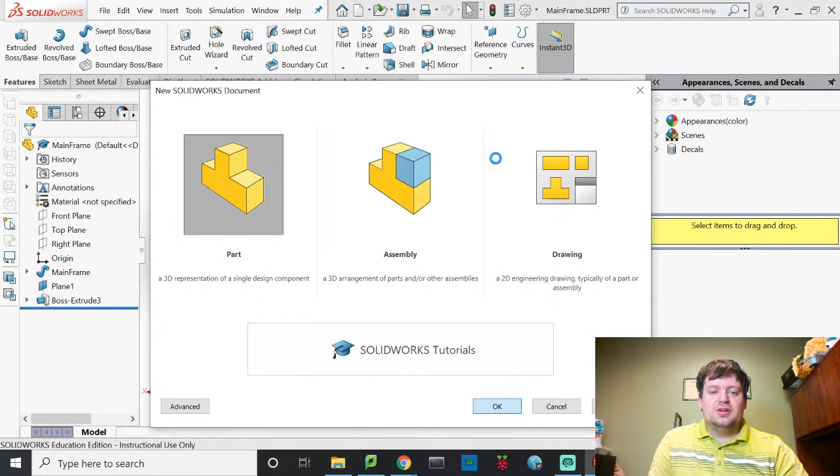What we're going to do now is go up and create a new file. Again, we're only really focusing on creating parts right now. You can create parts from an assembly drawing; in my opinion, it's bad practice, but you can. So I'm going to start with a sketch. For my sketch this time, I'm actually going to be drawing on the top plane. I want to extrude along the front plane, but I'm going to create something on the top plane. And I have my reasons for this.

So here I'm going to create a rectangular profile. Okay. Then I'm going to add a relation to make the center point of this line, which if you hover over it long enough, eventually you'll find it. And I'll add this one, and it will make them be horizontal. It doesn't really do much for determining position, but it does force that to be in line with the origin of this drawing. So I'm going to go ahead and hit OK.

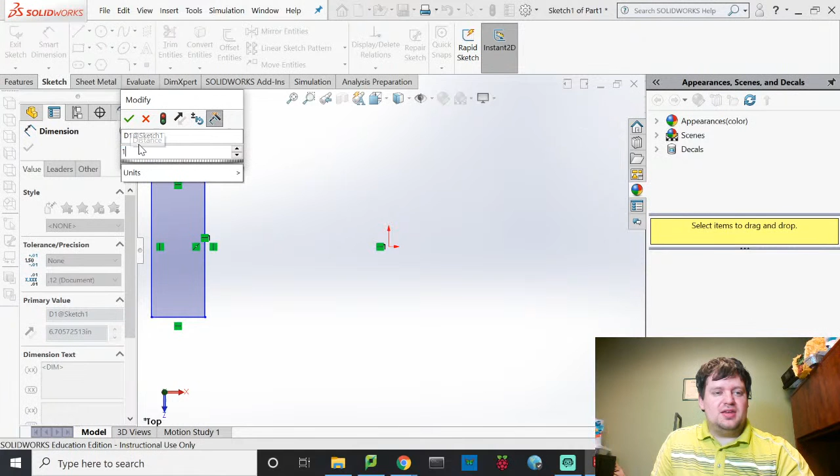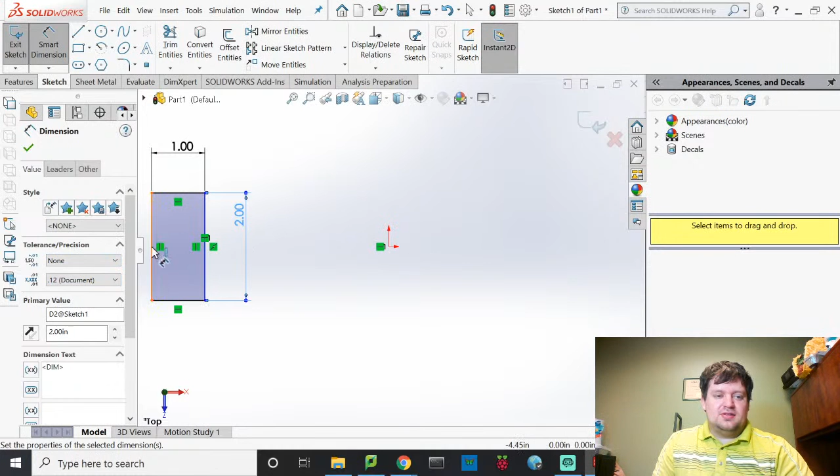I'll throw some dimensions on this. Here we'll make it maybe an inch thick, and then maybe 2 inches thick. And then since for this component I'm designing a wheel, I want my overall wheel diameter to be like 30 inches. So the distance between this outline line and this point right here is going to be 15 inches.

Okay. And now you'll notice, just zooming in by scrolling the mouse wheel and panning by holding control and holding the mouse wheel, I just have a rectangle, and that's it. So I'm going to exit the sketch and show you what this looks like. Exit the sketch, go into features. I'm going to do a revolved boss base. What a revolved boss base does is it allows you to rotate a profile, and here on my selected contours I'm going to pick this one, about an axis.

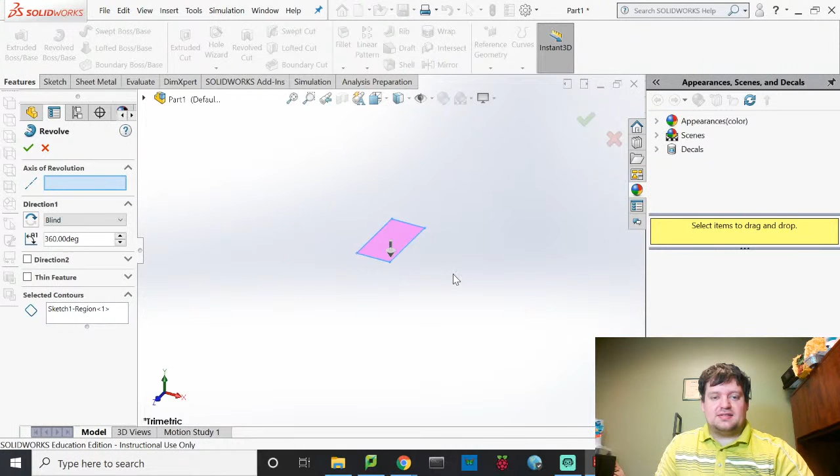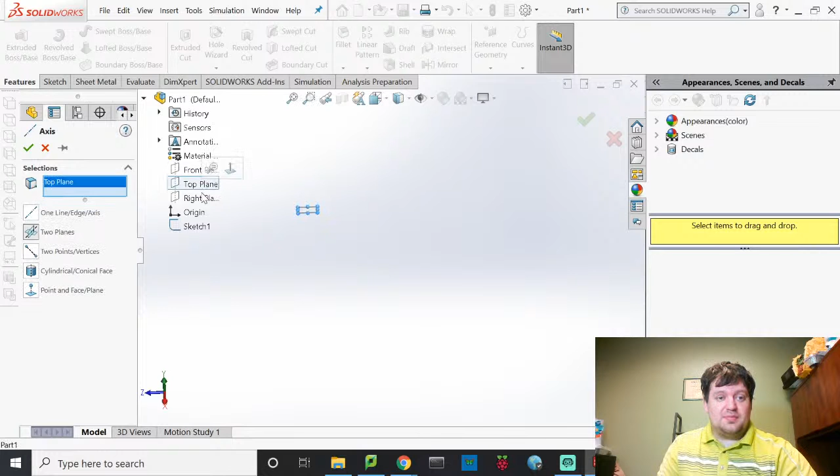Now here, I don't have an axis picked. I don't have an axis drawn that I can even really rotate about. So at this point in my drawing, I actually can't do the revolve yet. In order to do the revolve, I'm going to create some reference geometry. I'm going to create an axis, click two planes, and for my selection, I'm going to pick the connection between the top plane and the right plane.

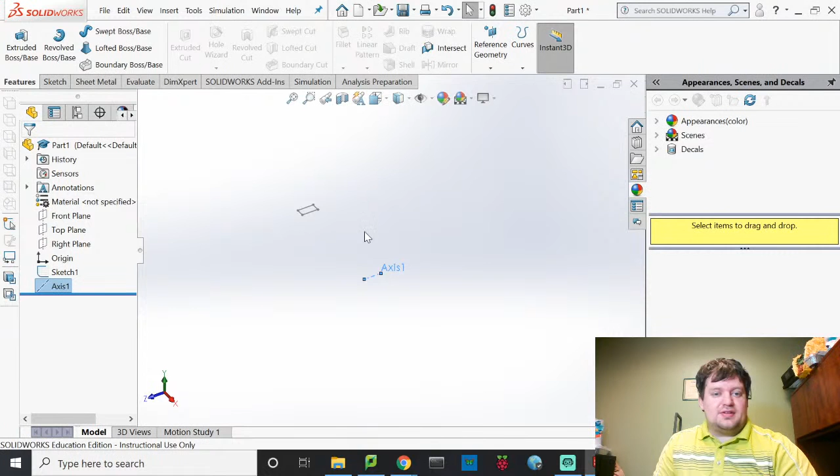Okay, so those two, and having the intersection of them, if I hit yes, it'll create an axis at the origin where the intersection between the top plane and the right plane is. That was the whole reason why in this sketch I made it so far away from the origin, because I was going to put an axis there. You could also draw a line in your drawing that defines your axis. That would have worked too. I actually like drawing axes just because I'm weird like that.

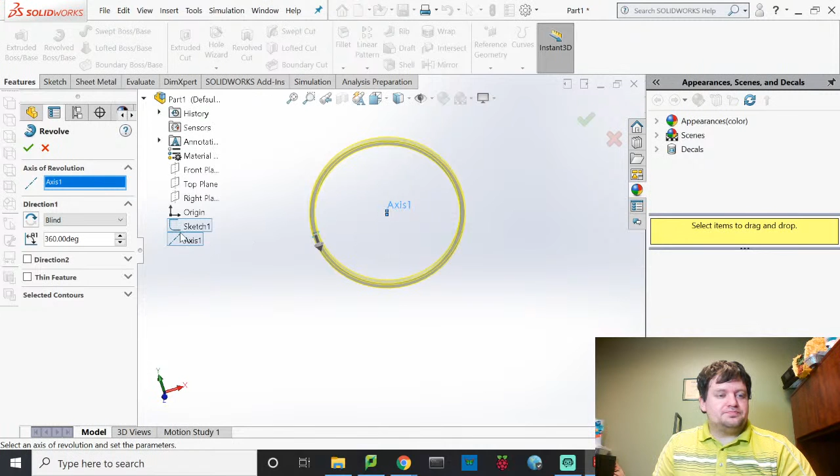I'll go ahead and pick my axis, and you'll notice right away it draws a loop. I have some features that I can change here, like I can only make it a half loop if I wanted. You could also say only rotate up until it intersects with the surface. You can make a thin feature, which will just make it a thin hollow tube, which would be a more accurate tire, but it is what it is. So I will not be doing that. I'll go ahead and hit OK.

And this is now my tire. Now my tire looks terrible. This is very old school. It's like one of those old wagon wheels, just throwing some spokes in here and we'll have a good old time. Yeehaw.

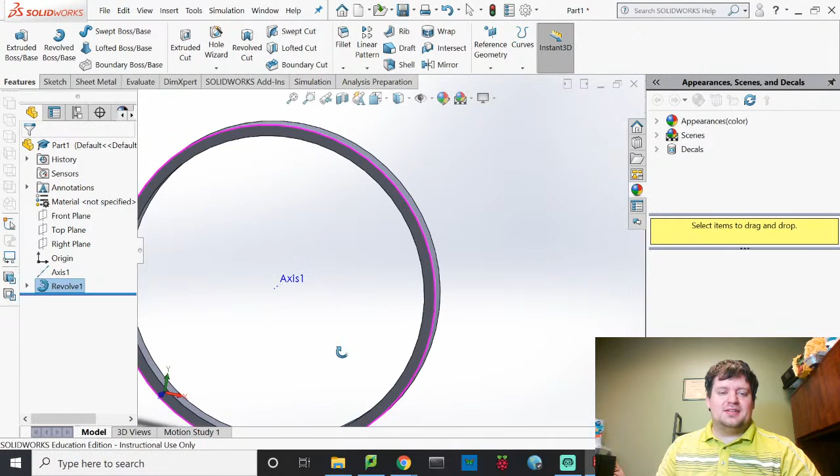Yeah, no, I am going to go back in and I'm going to edit this quickly just to give a little bit of a different shape. Now, if you would have done this right the first time, good on you. But I did not. So here I have this rectangular shape.

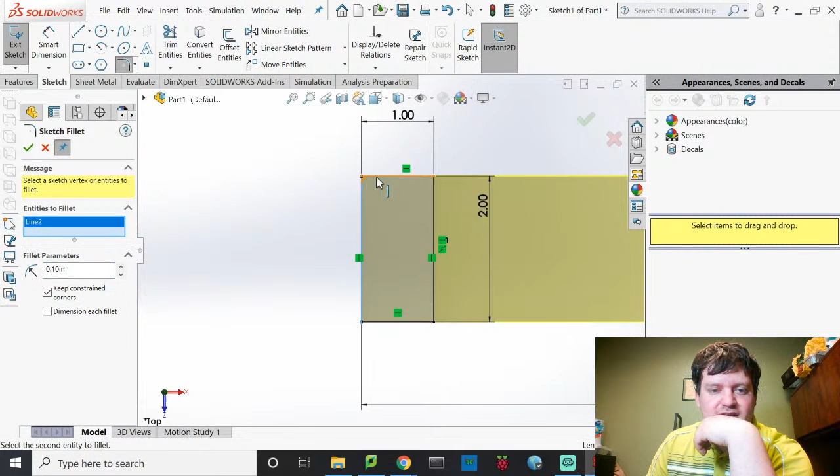What I'm going to do now is I'm going to go in and I'm going to fillet this edge here. I'm going to change this edge radius to about 0.5. Give it a big curve. And I'm going to do the same over here. Pick these two and hit OK and be done with it. And this is going to be my new bike profile.

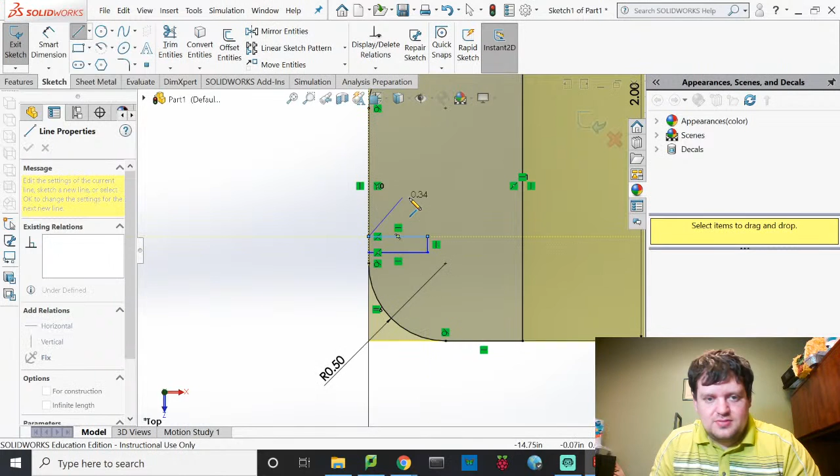Now I'm going to give a few little central creases in here. This will be like a road tire, something like that. So I will do that. So start on this line, go over here, go back, enter, enter, and then you know what

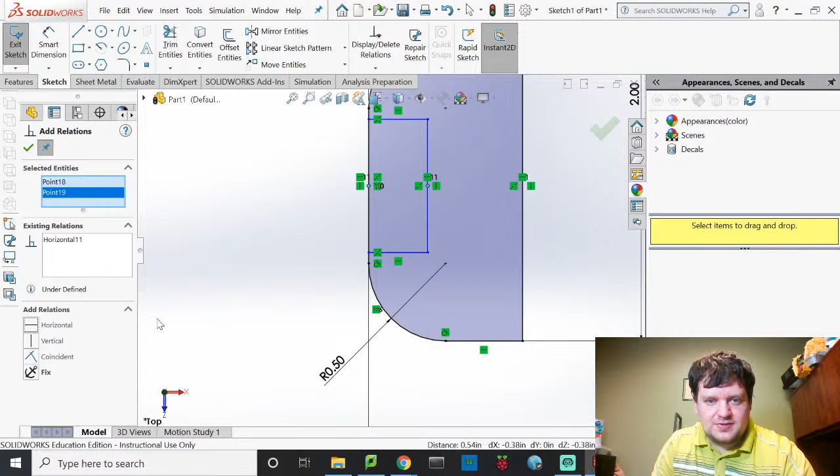I will do actually is I'm going to move this to the center, so I'll add a relation between this and the center line here, and I will make them horizontal. Okay, so now it spans the center here. I'll give some dimensions to this. This distance here, I want it to only be about the thickness of a penny, so about 0.05 inches. I'll make it real thin.

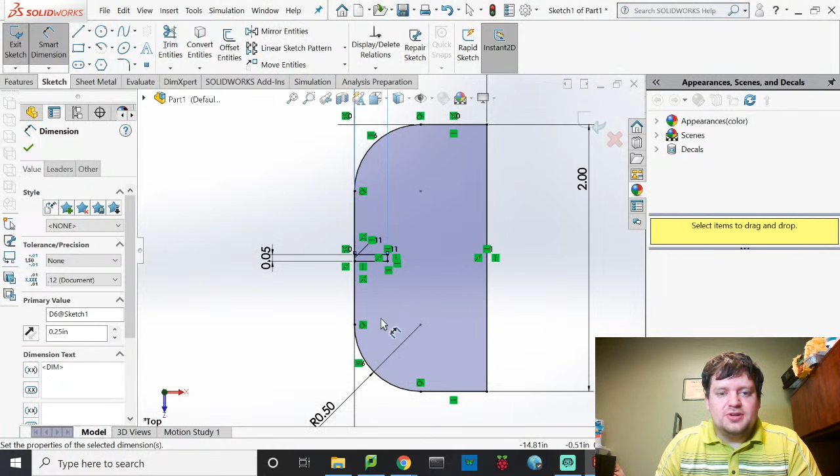And then for length, I want this to be, I don't know, maybe, they're usually pretty shallow. I'll make it about a quarter of an inch. Okay. So that's my new tread line. Now you'll notice this is fully defined. The only thing I'm missing is I need to trim that. So we'll go in, cut that line, and we're good.

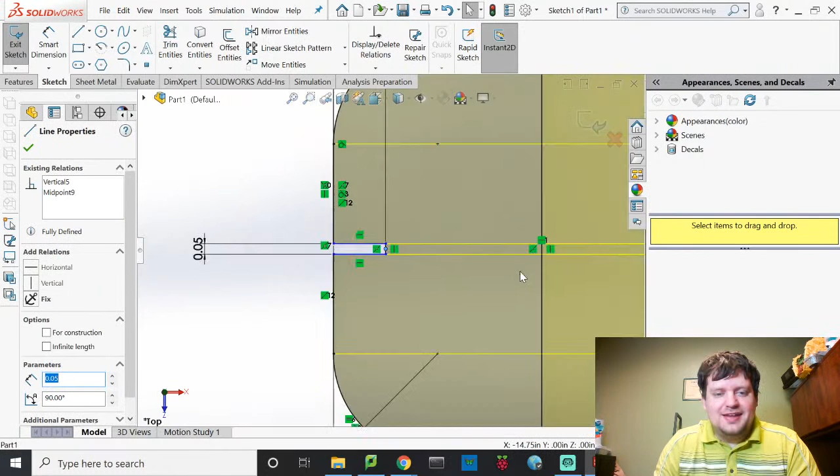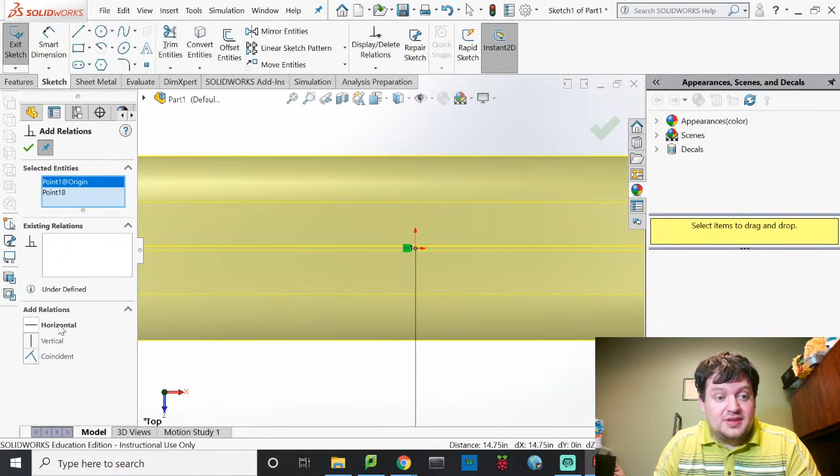Oh shoot, I just cut one of the relations. Yep, oops. I'm gonna have to fix that. I'm actually gonna add a relation between that and the center origin, because I know I'm not going to delete that. Okay, so now my drawing should be fully defined again. Huzzah!

Now I want to have two more of this, so I'm going to create a linear sketch pattern. I'm going to have it go down the x-axis. Whoa, nope, that's not how you do it. Yeah. I don't want it down the x-axis, I'm just going to go ahead and type in 1 here, which basically says don't do it in the x-axis.

Y-axis, I'm assuming that's up and down. We'll say I want 3. Yeah, then it does go up and down. Even though it's weird, it says y-axis, it just means up and down. Don't know why that is.

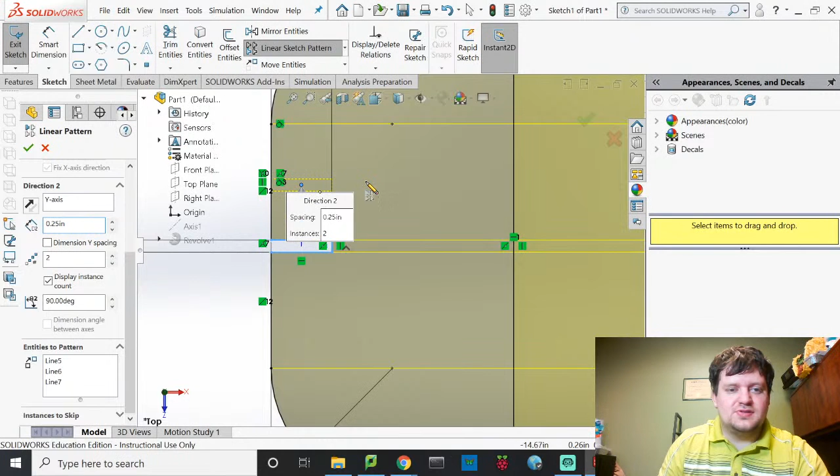And it's mirroring these lines, and right now I have a distance of 0.1. So, you know what, I'm just going to make this be 2, and I'll have it be 0.25 inches. Yeah, and that looks pretty good to me. So, yep, I'll go ahead and hit yes on that. I'm going to do that again on the other side.

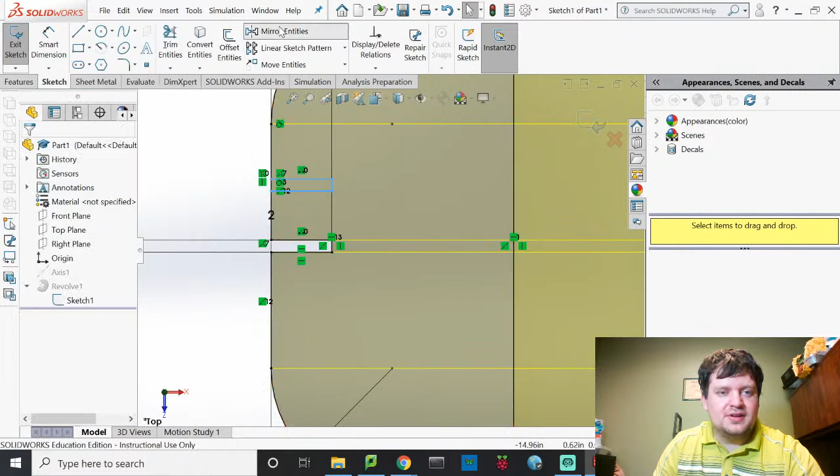Oh, you know what, actually, I'm just going to mirror this feature. So I linear arrayed it to create that one. It's all dependent on this feature. But now, I'm going to mirror about... Oh, I do not have a mirror line. Dang it, I don't have a... I guess I'll just... You can just copy these two.

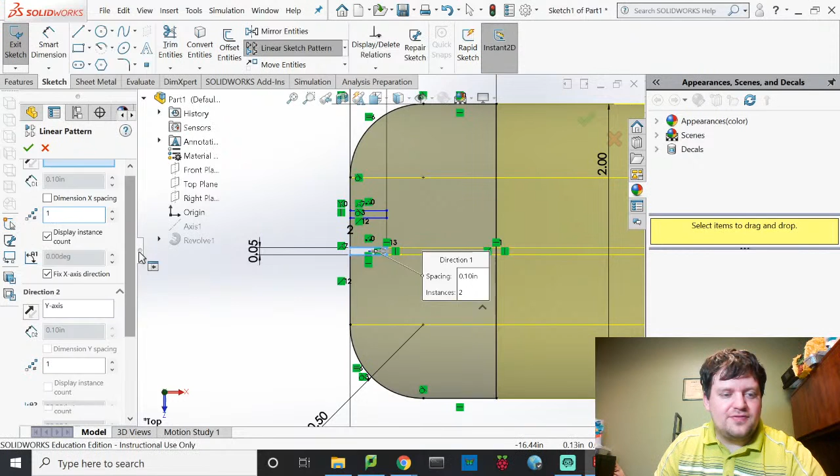So I could just hit copy, or I could try drawing the feature again down here and making the relations easy. But the nice thing about a linear sketch pattern is that it forces your features to be identical. So once again, I'm going to create 2. I'm going to have it go the other direction, and I'm going to put this at 0.25. Okay, I'll hit yes, and now I have this feature here, this feature there, that feature there. It's just nicely created, a couple of them.

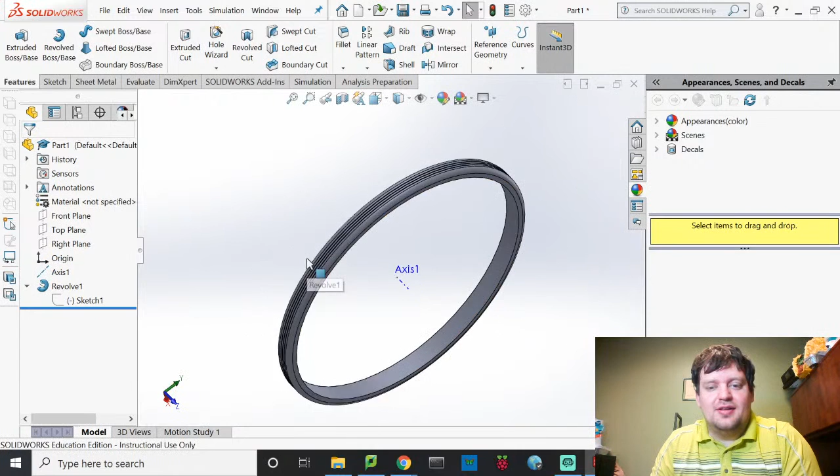Go ahead and trim this line, go ahead and trim this line, click out of that, and now I have my 3 grooves. I'll exit my sketch. You'll notice it automatically updates, and now I have this cool, I inappropriately use the word cool. I have this tire, and this is now a working tire.

Now the way that I have this designed right now, this is a solid rubber tire. I don't care if you make yours pneumatic or solid rubber. It's probably a lot easier to design a solid rubber tire. So it really hurts me none. Now, what I will do here is I've got this one revolve. I need to put in spokes, and I need to put in a rim.

Now, in an actual SolidWorks drawing, you'd probably want to make them different parts, unless you were going to buy this entire thing from one single distributor. I'm planning on buying all of this from one single distributor, so to me, modeling it as this is the tire tread, this is the rim, these are the spokes.

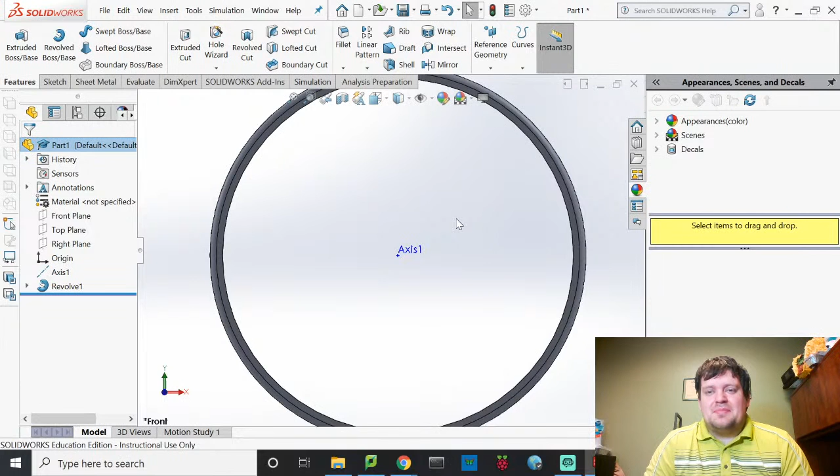While that is accurate because they are parts, in reality, they all come from the same distributor, and I'm not going to be disassembling the rims and spokes and tires, so there's no reason for me to model it as multiple parts. I'm just going to make this wheel be one part.

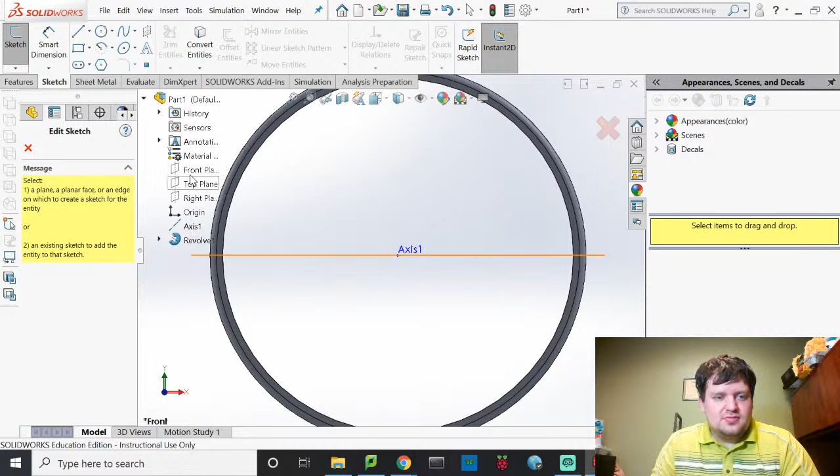So I'm going to go ahead and sketch here, and this time on this sketch, I'm going to sketch on the front plane, which is what I'm looking at. And I'm going to draw a circle from the origin that connects with that line.

Okay. Now you'll notice this is blue. The reason why it's blue is because I haven't added a relation to force it to fit there. So I'll go ahead and do that. Oh, it's not going to let me do that. But I can create a smart dimension to do it. And I'm going to force that distance to be 0. So now it is brought up flush with this edge.

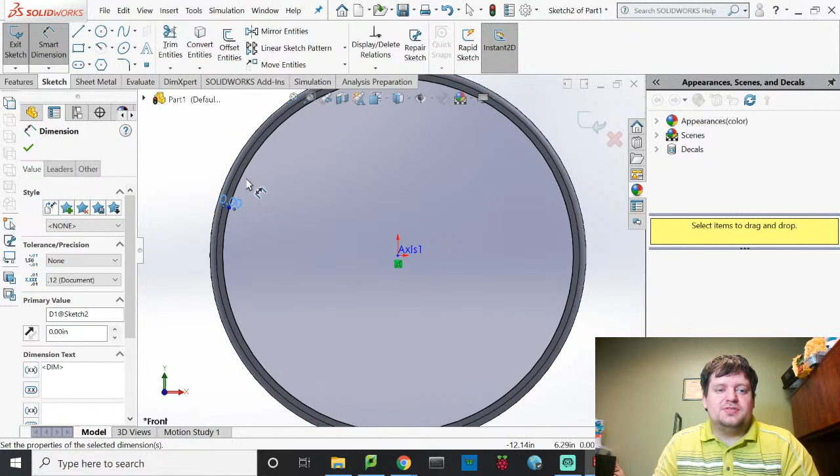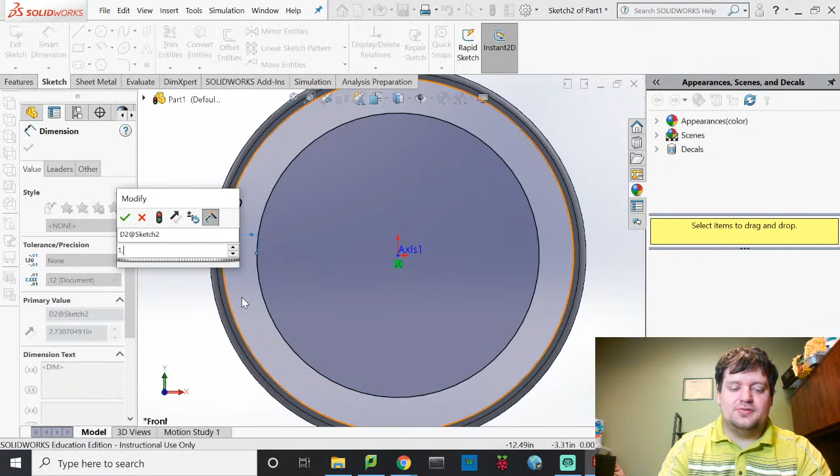And because the dimension is relative here, if I do make my wheel size larger, this will always stay at 0. I'm going to draw a second circle that's going to define my inner rim. Smart dimension, this to this, and my rim width is probably going to be about 1.5 inches, so 1.5. Okay. Then I will exit sketch.

Now, because I was drawn on the center plane, you'll notice that it's right in the middle of my wheel. So what that means is when I do this extrusion, extruded boss base, I'm going to be extruding on the midpoint. So rather than blind, we'll do mid-plane. And then the overall width of this, I believe, was 2 inches. So I will say 2 inches. And hit yes.

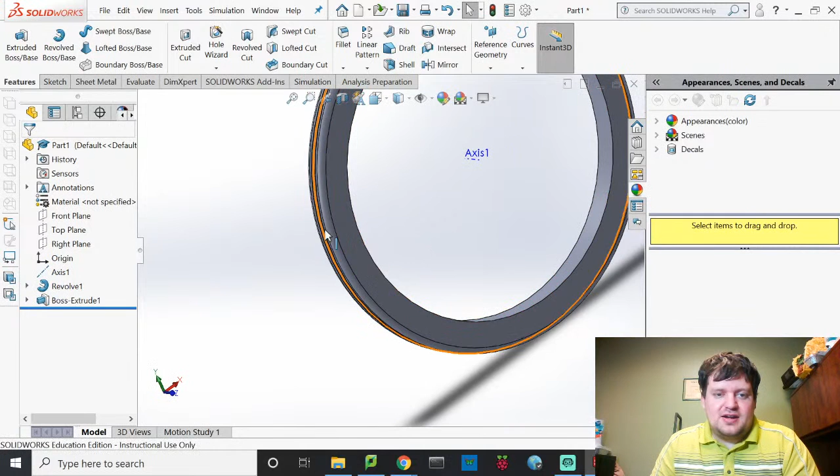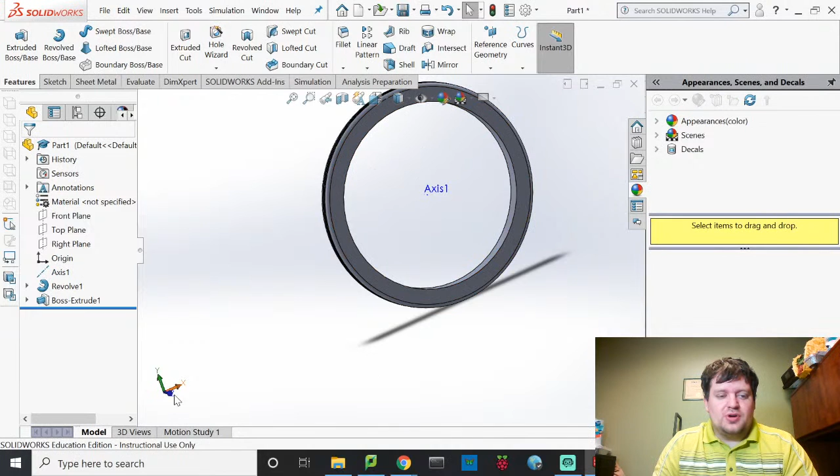And that's my rim. So now I have the tire tread, I have the rim, which is a gigantic rim. But you know what? I made a rim. The next part that I'm going to want to make is, in a wheel, there's a center bearing. Now, I told you not to focus on connections yet. Here, we're going to have to focus on connections. We can make this whole thing solid if you really wanted to. But we've reached the point where connections matter.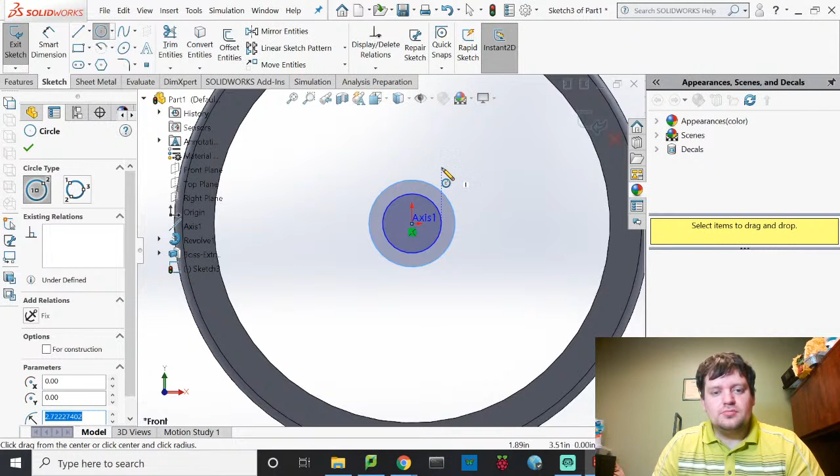So what I'm going to do once again is I'm going to sketch, and I'm going to make my sketch on the front plane. And I'm going to draw just a center wheel bearing, which is basically a hollow tube that your axle runs through. Okay. So, I got those. Go ahead and smart dimension. This tube thickness, they're pretty thin tubes. This is about 0.125 inches.

And then the inner diameter of this... I shouldn't have selected the origin for some reason. I'm too busy doing this in AutoCAD. The inside of this, we'll say, is about 1 inch. Because usually the center hubs are not very thick.

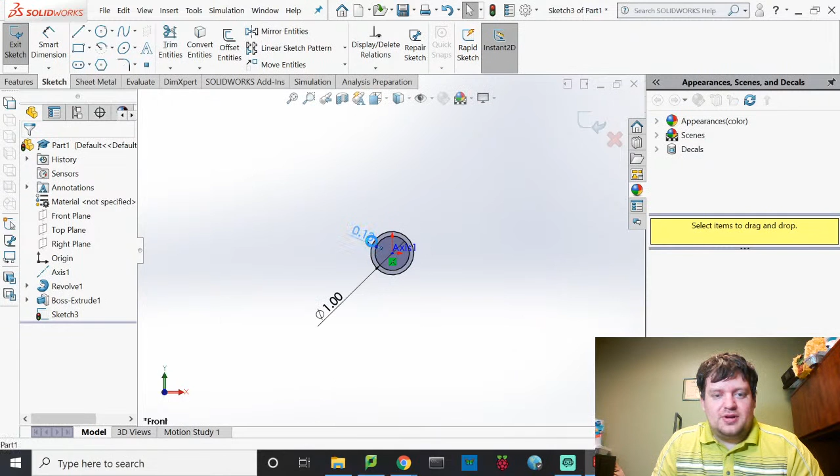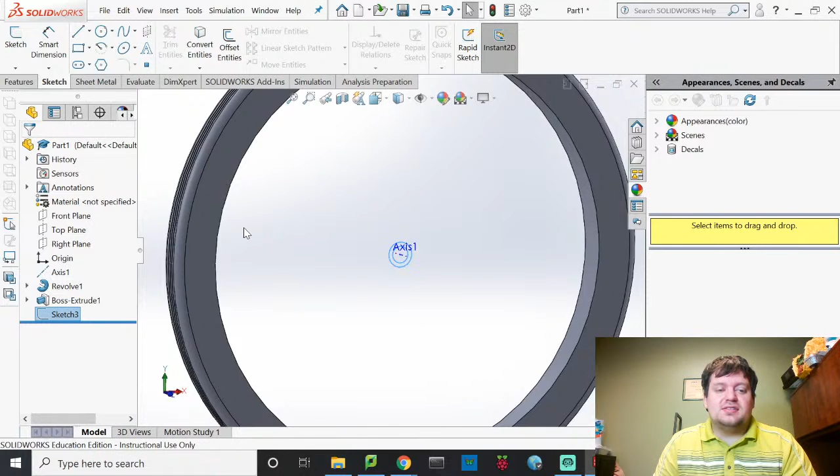And you know what, I might just beef this out to make it 1/4 of an inch thick now, just because we're going to be putting some loading on that. And we need some space to project to for our spokes. So go ahead and exit sketch. And once again, I drew this on the center plane, so I'm going to have to do a mid-plane extrusion. Now this is going to go a little bit outside of the tire because usually these hubs do extend a little bit out.

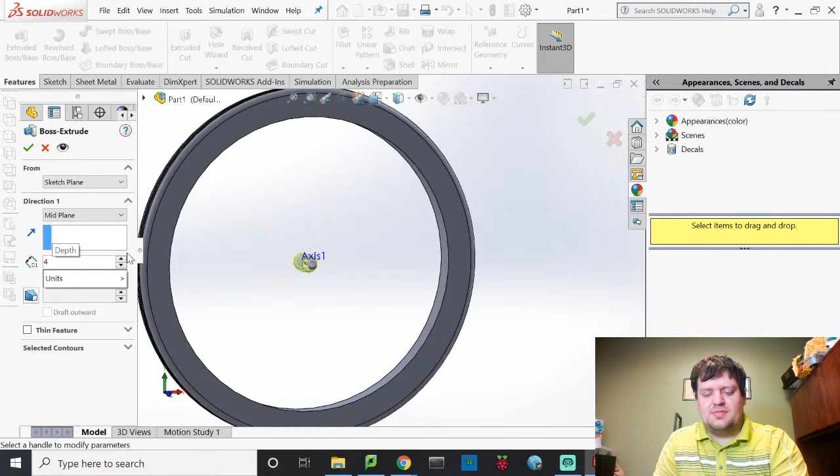So once again, I'm going to go to Extruded Boss Base. Here, because I drew it in the very center, I'm going to do a mid-plane extrusion. And here I actually want this to be about 4 inches. So, yay, now you have a center to my wheel. Now the next thing that I'm going to do is make spokes, and I'm not going to make them very well.

No, I'm going to make spokes well. What am I talking about? I don't have to be a terrible person. I mean, I choose to. I don't have to be.

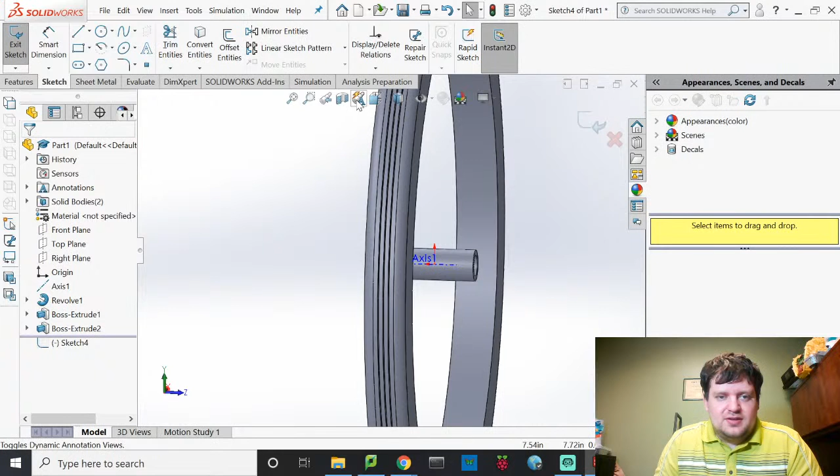Okay, so let's see. I'm going to draw this on the right plane. So do sketch. Go up to my planes, pick right plane. So now I am sketching on the right plane. I'll go up to my tools. This allows me to change my view orientation. I'm going to pick normal to, and that just means that now I am normal to my drawing plane. Okay.

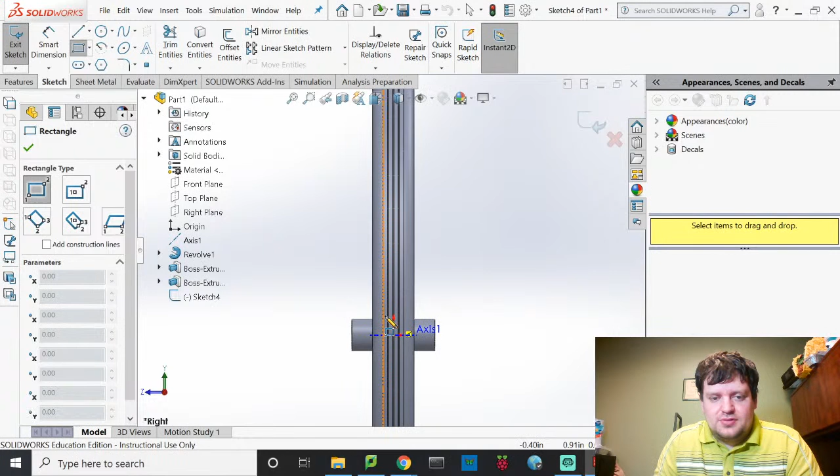So what I want to do is I want to create a single spoke. I want it to be circular, and I want it to go out like that. So here I'm just going to draw a rectangle, and then I'll rotate the rectangle to make it into a circle. So start my rectangle here, and I will end my rectangle. Oh, where are you? Oh, way up here. Okay, so that's going to be the length of my spoke.

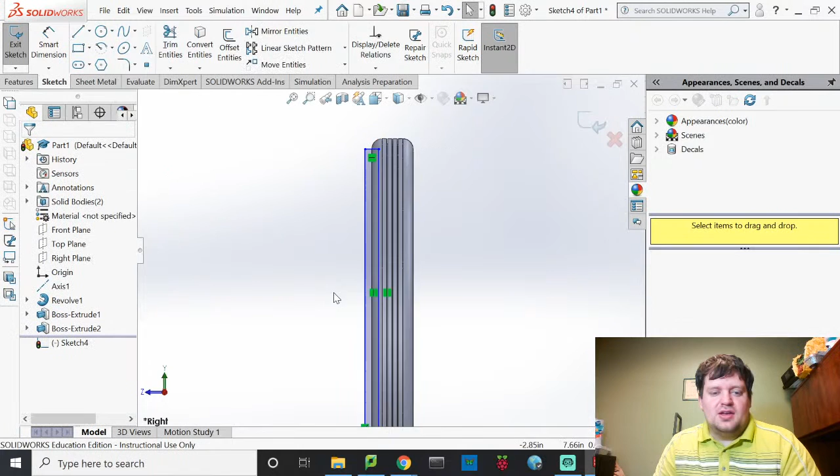My spoke goes from that center hub. Oh, I guess I should have it go to the inside of my rim, huh? Oops. I'll fix that in smart dimensioning. Oh, it's trying to make me create an angle here. Yeah, that is a 90-degree angle. Yes. I'll go ahead and click this to become right. Oop. Let's see if I can select the inside of this rim.

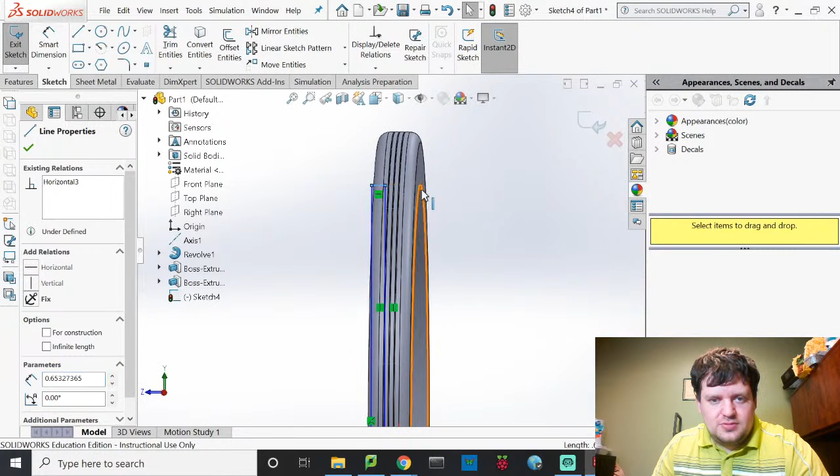No, I actually can't. That sucks. Oh, and I haven't saved in like 20 minutes.

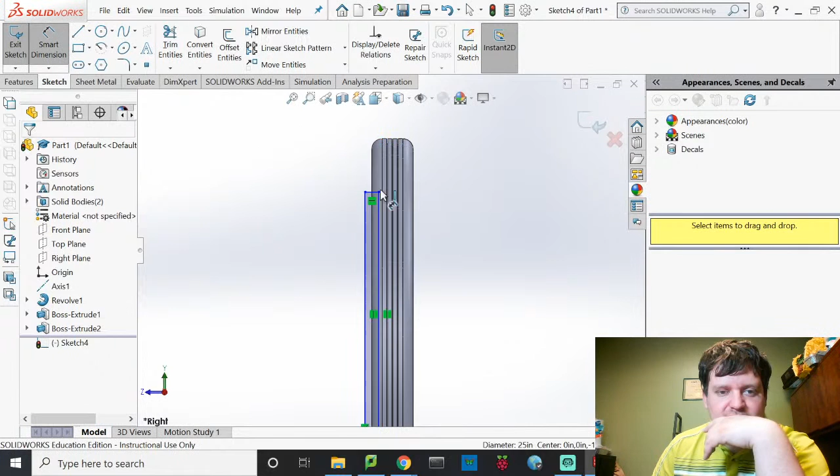So I'm just going to smart dimension this. Let me see if I can select this line way up here, or a point or something. Come on, man. Oh, it's not going to let me. I think I can select this point here, I was able to earlier. You know what, no I can't.

So I've got this is half an inch. Up here this is 1.5 inches, so that's 2. And then I've got 1 inch, so that's 3. And this is all 15 inches, which means the dimension of this line should be 12.

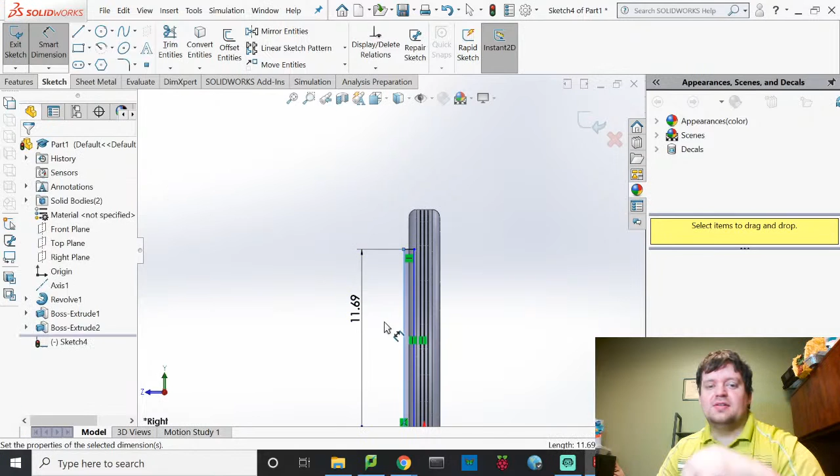Okay, and my spoke, I want it to be pretty thin, so I'm going to make this just 0.15, pretty thin.

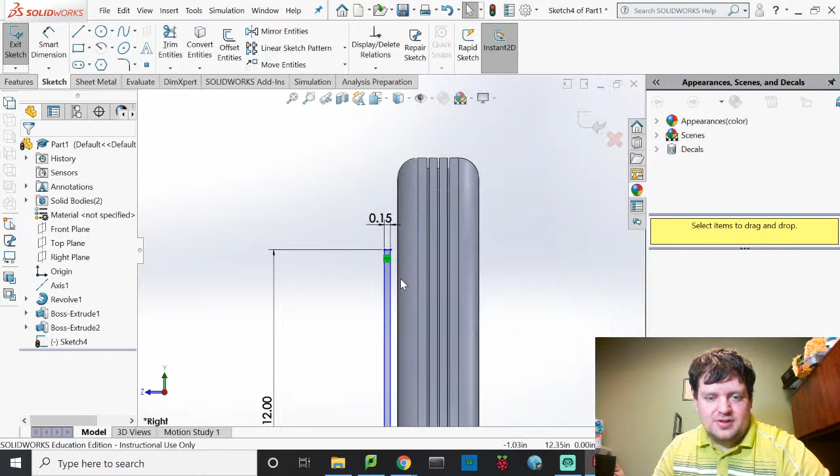And I want to add a relation here because, again, I want my spoke to be about in the center. I'm going to zoom in on this point here, which it appears this point nicely stayed on that line.

But I'm going to, nope, not smart dimension, going to add a relation. That forces my center point and my origin to be vertical.

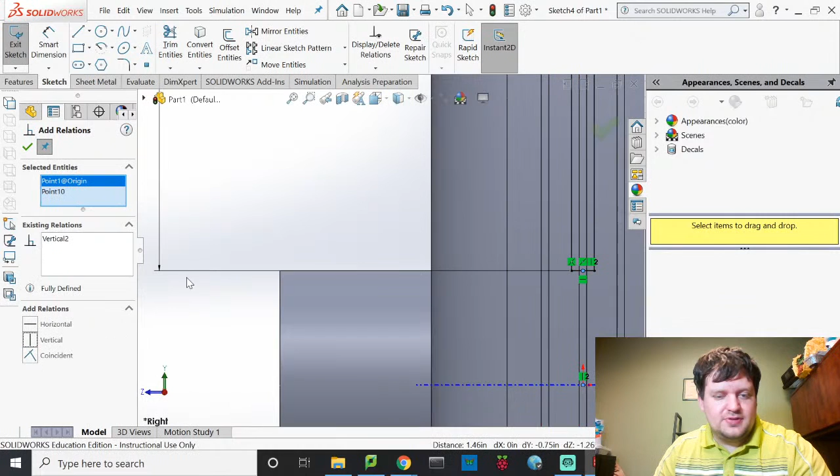And if I'm right, that fully defines my drawing. Go ahead and check up here real quick. Yep, we're good to go.

So if I exit sketch, click Revolved Boss Base while the sketch is selected, I only need to rotate this 180 degrees.

And the axis of revolution, oh, I didn't even draw an axis. It's 2 times in a row I forgot to do that. I'll go back on my sketch and I'll just draw it in there.

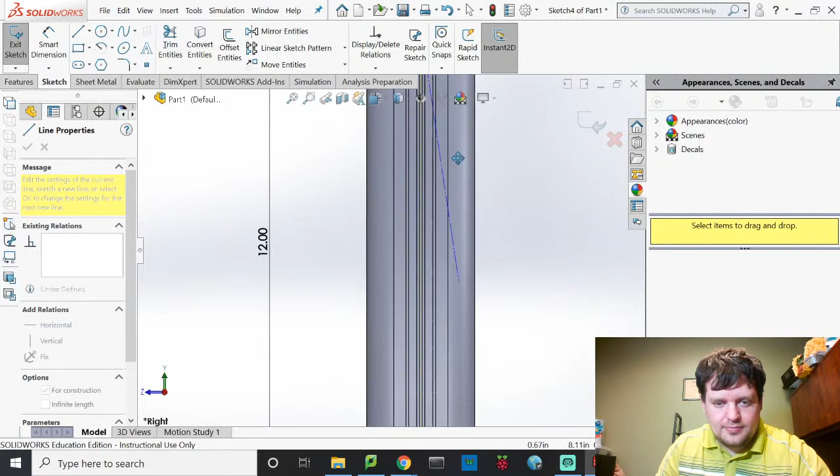So right click, go to edit sketch, create a center line, and it's going to go from your center. I remember to hold down Control when I use the center mouse wheel button, to your center.

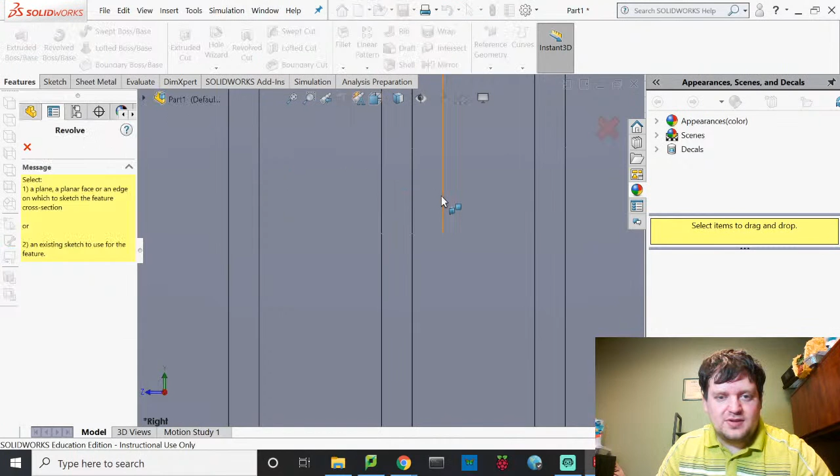Escape, exit sketch, and now we have an axis that I can rotate around. So Revolve Boss Base, I'm going to go ahead and pick this drawing. It automatically selects the line because I drew it in as a center line.

It automatically recognizes, oh, you probably want to use that as a center line. So, selected contours. Oh, I actually picked the wrong line. Pick this line, there we go. And then selected contours, I want that.

And I only want it to go 180 degrees. It's not giving me that, doesn't like that I'm mirroring about the center.

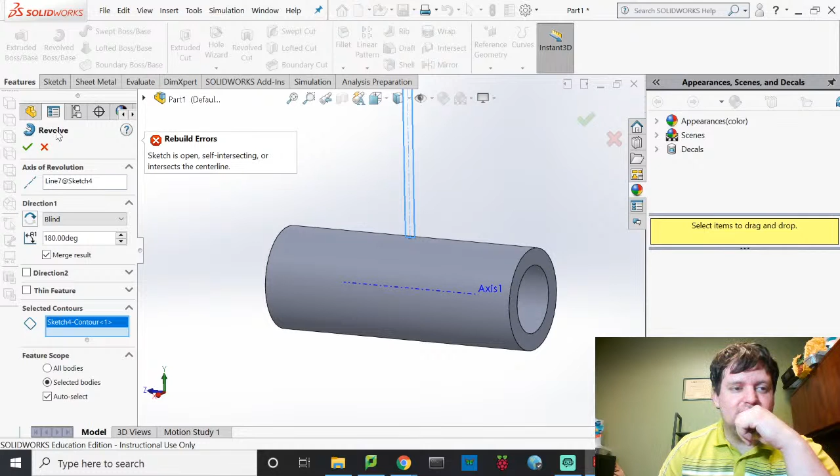Wonder if I can just, yeah, oh there we go, does the same thing. I only ended up rotating half of this. Now I only made it go 180 degrees, so I've only got half of a spoke. So I'm going to need to go back and fix that.

Whoops. Sometimes you just have to work with a program. Okay, so now I have one spoke.

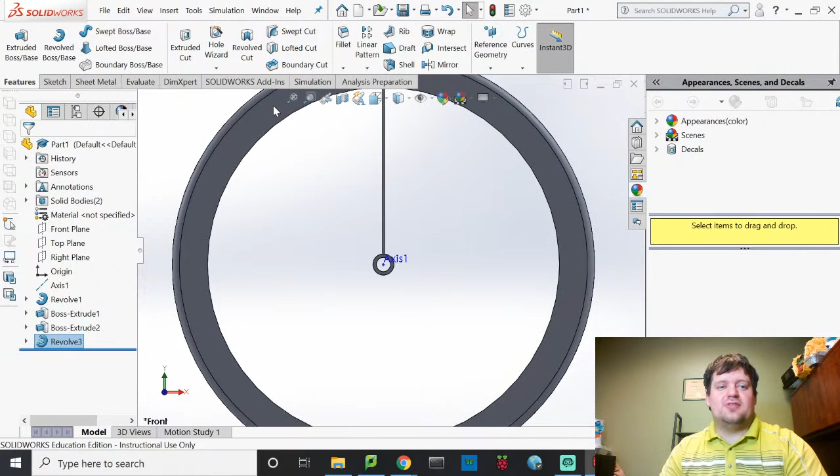Nice. Now having one spoke does make everything a lot easier, because now I can do a rotational pattern. So here's a linear pattern in the features tab, switch this out for a circular pattern.

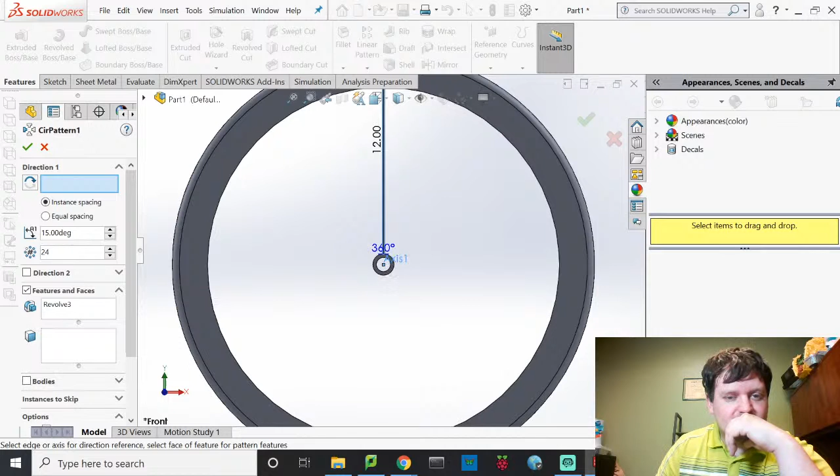Okay. This is my revolve, that's what I want to go around. On the direction, oh I'll pick this axis as my center point, and it has already assigned that I want 24. I think that actually looks pretty good, so I'm going to go ahead and hit yes.

And there's my tire. It's got a 1-inch center hub, it's got a 1.5-inch outer rim, a 1-inch tire outside of that. But I have a tire.

And the thing about this is I put this axis in here. This axis is something that I'm going to need to use when I connect to this wheel.

So we will talk about that in another video, but now I can take this and I can look at my other SolidWorks file that I have open, which is this one, and this wheel is going to go about right here and one over here.

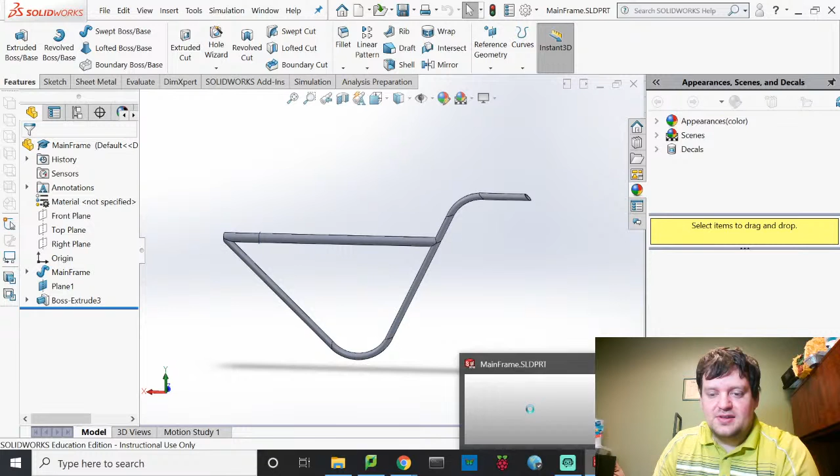They're both going to be about the same size. They're both going to be exactly the same size. But those are now my two parts.

So I'll go ahead and file, save this, and save this as a wheel.

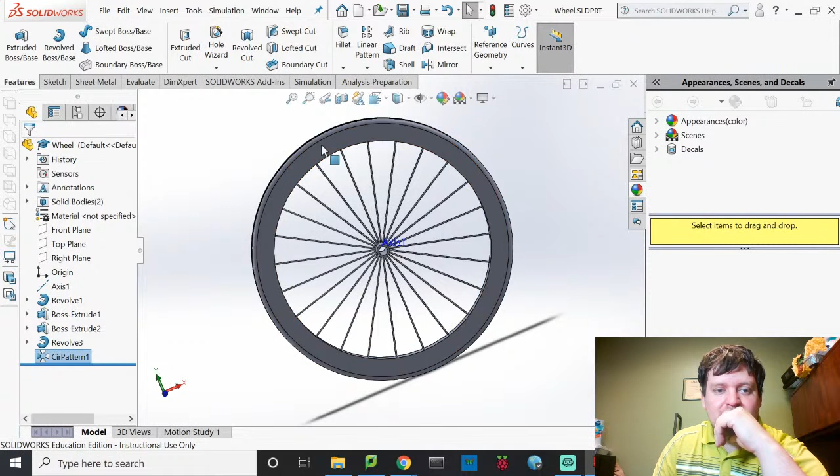Okay, again, I could go back in and edit this if I ended up deciding that I don't like that. I'll have to make some changes.

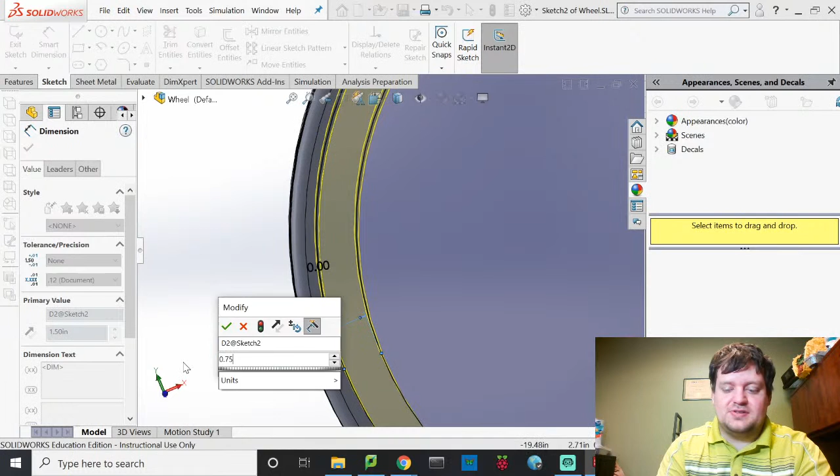If I do shrink the rim diameter, which, based on the way that I made it, it's not pretty. If I shrink this rim diameter and I say, you know what, this should only be 3/4 of an inch, I'll double click on this dimension that I used to create it, change it to 0.75, and then hit yes.

Exit sketch. Based on the way that I made this, my Revolve 3, oh, why do I even have a dimension there? I don't understand what that's doing.

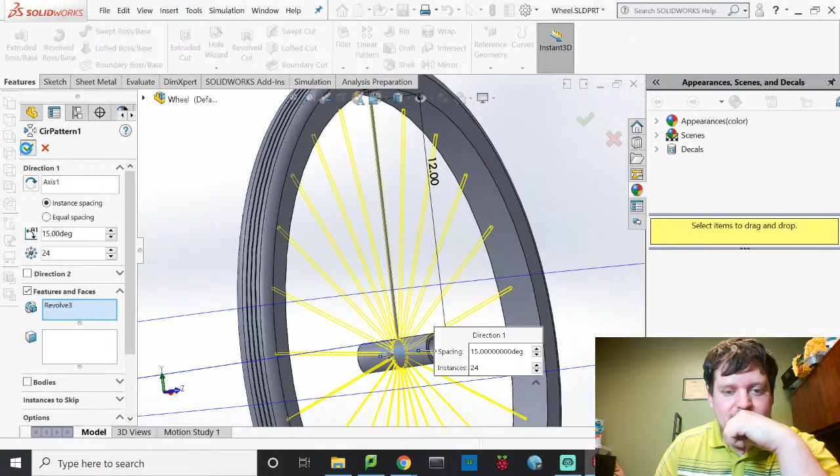Yeah. Exit sketch. Circular pattern's having some issues. Oh, it just wants me to verify it again. Aren't you?

Why aren't you showing up?

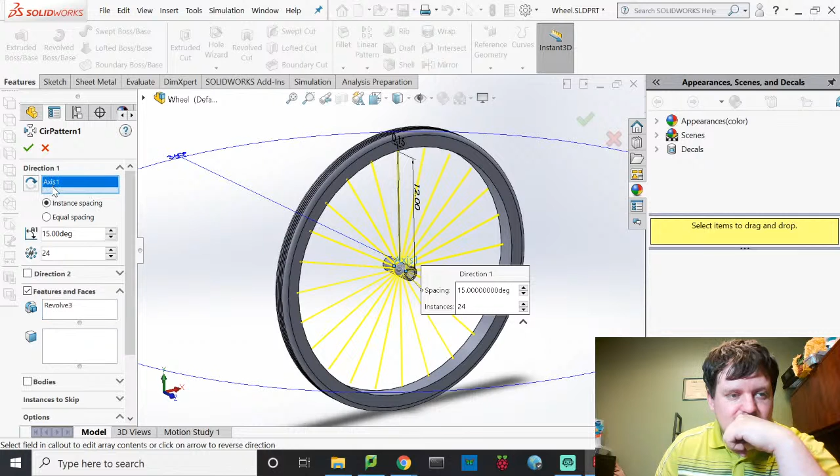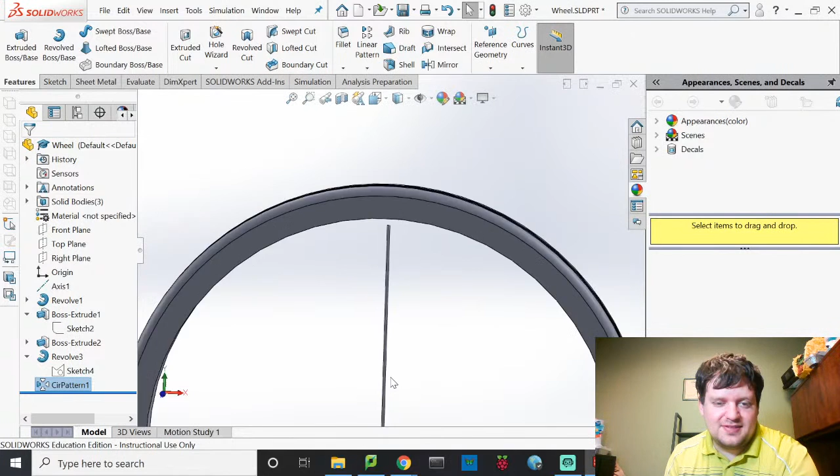Back in and fix that again. For some reason it's not happy, I think maybe it's in part because I drew the spoke poorly. We'll notice it doesn't even go up to that surface. So I'm going to go back in and fix this spoke too, because I don't want to delete the circular pattern. Oh no, I will have to delete it. I'll delete the circular pattern too, and the sketch. I'm actually going to delete the sketch too.

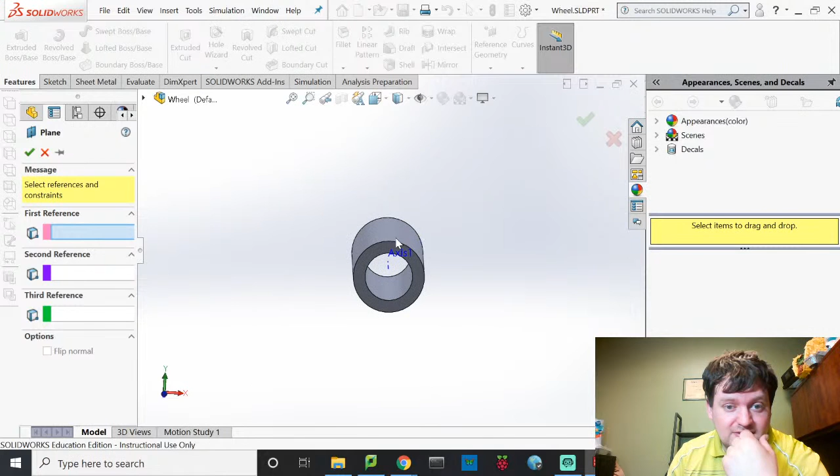I'll try again. This time what I want to do is create a plane to draw on that's going to be on the outside of this. So create a plane, and my first reference is this outer surface. The second reference I need is that I want it to be front plane, and parallel to the front plane.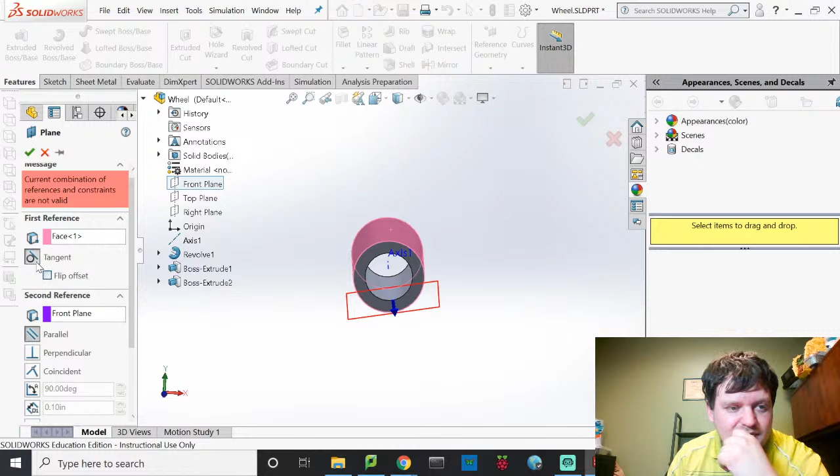Cannot be perpendicular to axis. It's not perpendicular. I wonder if my second reference I can use the axis itself. Nope, I can't, it doesn't like that.

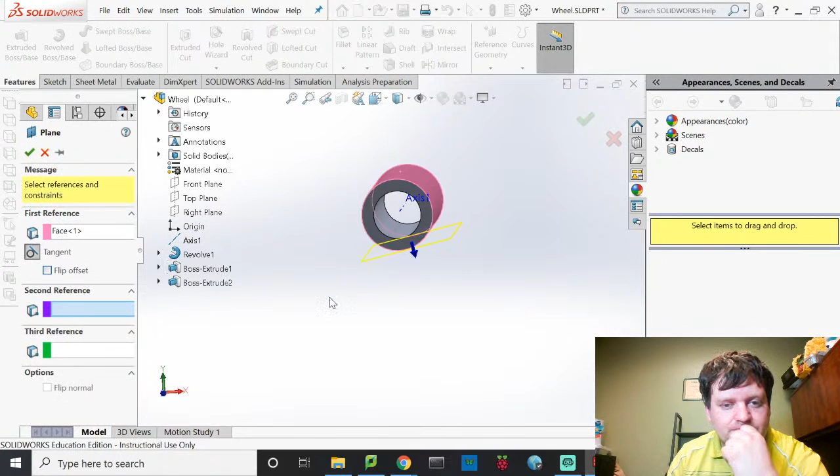I want it to be... oh, it's top plane, there it is. I can make them perpendicular and do that. You know what, I don't want it to be perpendicular, I want it to be perpendicular to the front plane. No. For some reason it just really does not like it when I select the front plane.

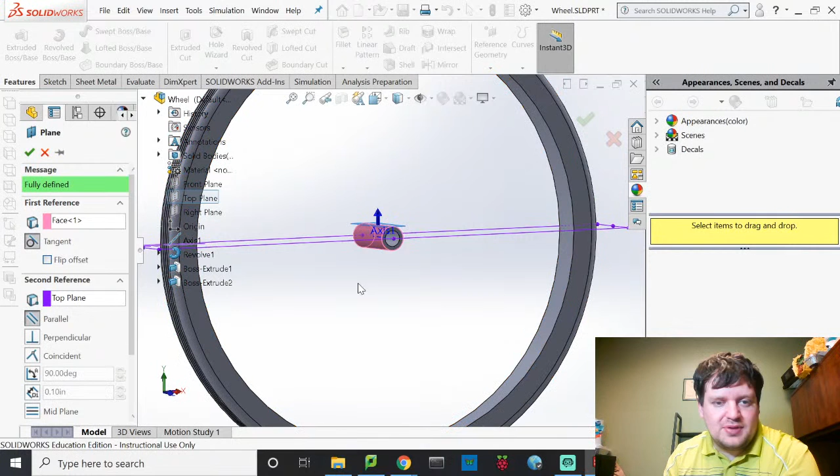So, gonna make it parallel to the top plane. Oh, I meant the top plane, I accidentally did. Okay, and then I'm going to draw on that sketch.

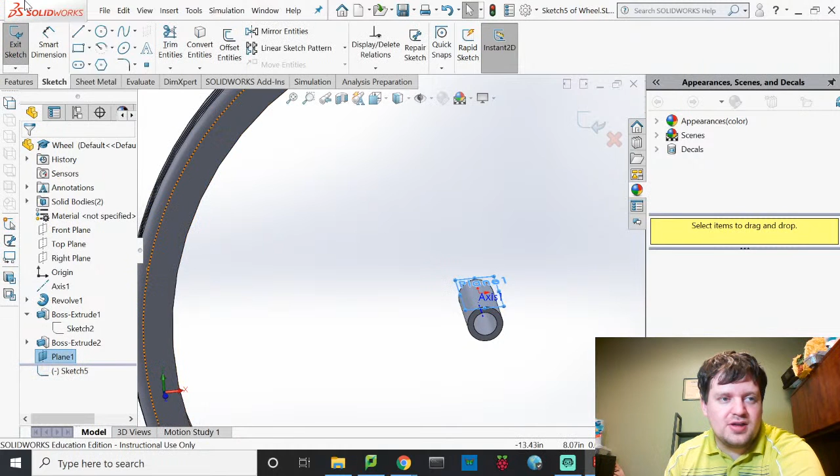Now this sketch, this plane is always going to move. Whatever the diameter of that hub is, that plane is going to move with it. So if I click sketch, I've already got the plane selected. I'm now sketching on that plane. What I'll do here is just draw a circle.

I'll go to the top view so that I'm parallel with it. Draw a circle at the origin. I'll smart dimension it so that it's 0.15 - that's what I wanted. Nice, just like that, and now it's fully defined.

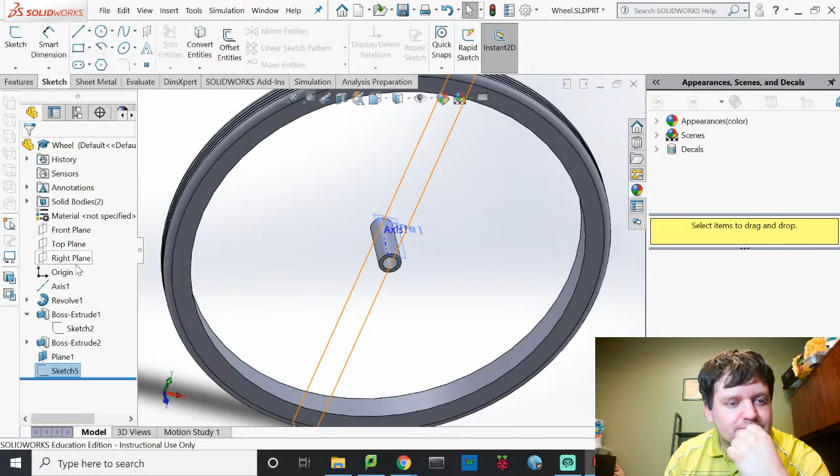I exit sketch. Okay, now instead of doing the revolve method, I'm going to do the extruded boss base, and make it go from this plane up to there, and then down to this circle. So two different extrusions.

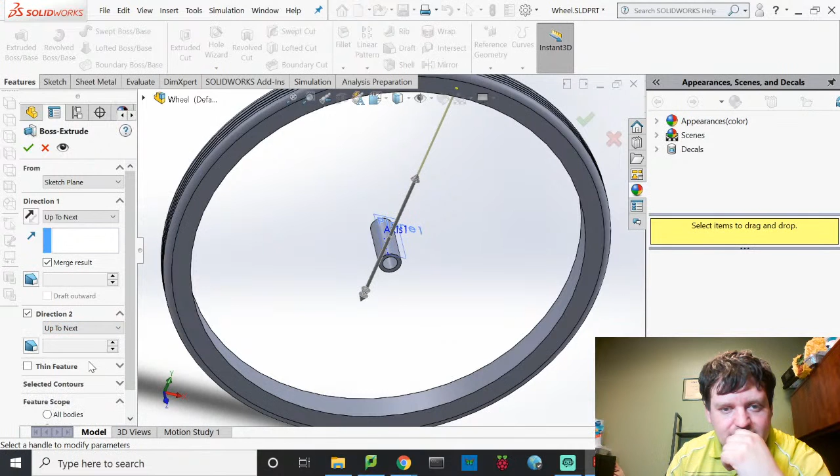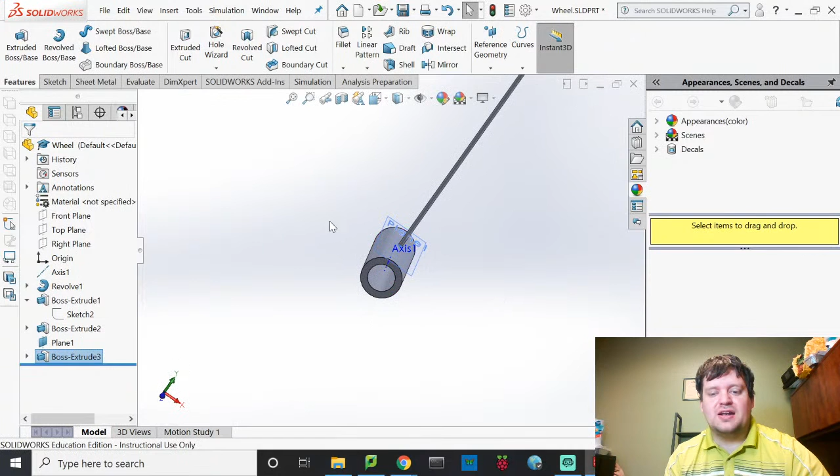Extruded boss base, I'm going to have it go up to next. And then we'll go direction 2 and then up to next. Hit yes. And now you'll notice that if I zoom in here, it actually kind of curves this a little bit to project downward into that circle. And up here, it projects up to there. So now if I change my rim diameter again, it should stay inside of here.

So now I'll go back and do my circular pattern again. I've got my boss extrude 3, and for the direction, I'm going to have it extrude around the center axis. I'm okay with 24, not going to play around with that. Hit yes, and now there we go - there's a tire, and it has much nicer proportioned rims.

Although I still don't like those rims. I'm going to change that to be about... no, that rim just looks weird. I don't like it, I feel like it didn't change at all. Oh, it did. It still sucks.

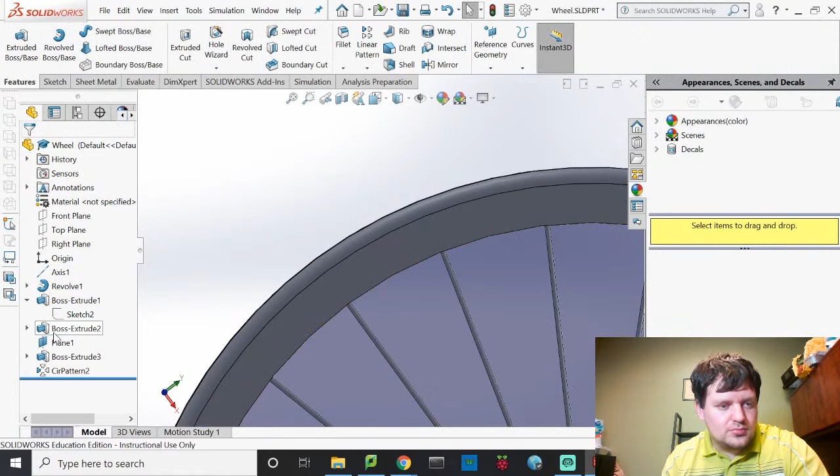Change this to a half inch. 0.5, let's make it a really thin rim. I think the rim should be thinner than the tire itself. And now when I go back, why is that so friggin' huge?

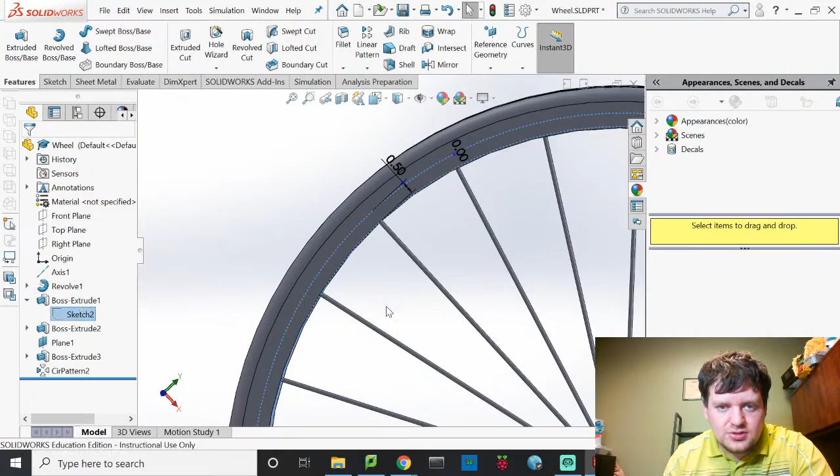Oh, it's because it's merging with the tire above it. Yep, so that's my part.

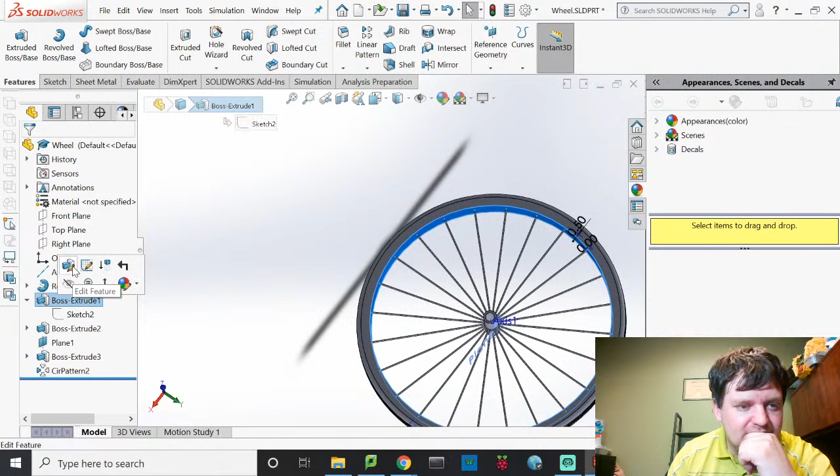And I'm pretty happy with that wheel. I'm gonna go ahead and pat myself on the back. That wheel looks great. I've designed part of a body and now a wheel, but I like this, it looks good. So I'll go ahead and save again, and I am done with this wheel.

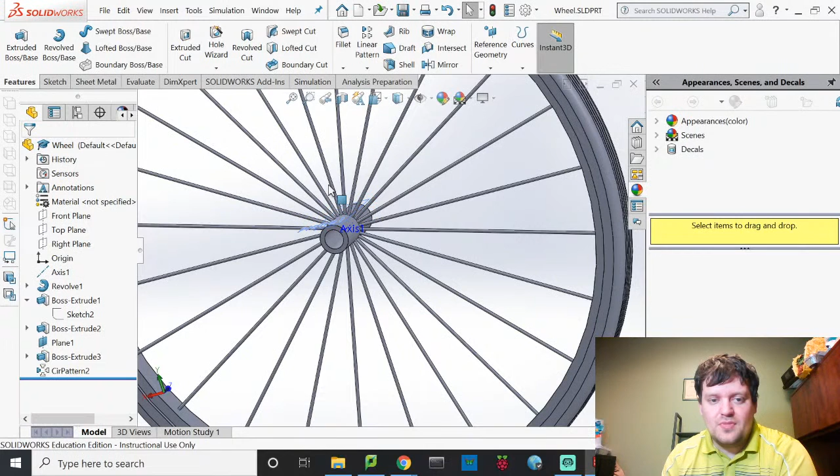I probably won't make any more edits to it because this is the exact wheel assembly that you would purchase from online. It's got a connection point to it, which I'll just have to force a connection point - it's a journal bearing basically. I will work on that when I create the axle for this, but I'll do that at a later date. For now, I've got this wheel, my central hub, and my outline of what I'm going to do for my chassis.

So that's going to be it for this week. Next week, I'm going to design the suspension for my rear wheel, how I'm going to connect it to my chassis, and that'll probably be front and rear suspension that I'm going to be designing there. And yeah, we'll see you next week.